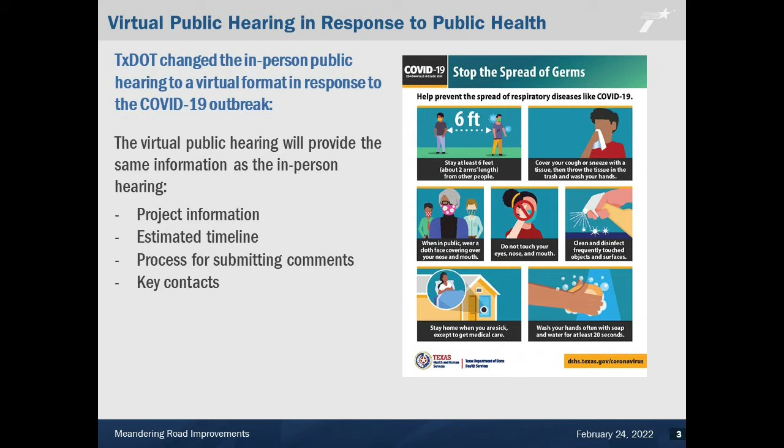All project information can be found on the TxDOT website. For health and safety reasons, we encourage the public to view the project materials displayed online to avoid in-person contact. Full versions of the virtual public hearing displays are available for download at www.TxDOT.gov, search Meandering Road.

The virtual public hearing has been convened by TxDOT and is being held to receive and consider comments from the public regarding the Meandering Road Improvements Project. You may have attended previous public hearings conducted by TxDOT. However, for the benefit of those of you who have never attended one, I would like to explain why and how the department conducts a public hearing.

A public hearing has four essential purposes: first, inform the public of the status of planning for the project and present recommendations based on studies performed to date; second, describe the project so those attending can determine the project's potential to affect their lives and property.

Third, provide the public an opportunity to see information and express their views at this stage in the planning process when flexibility to respond to comments still exists and before location and design decisions are finalized. Fourth, and finally, to develop a record of public views and participation to accompany recommendations for subsequent decisions.

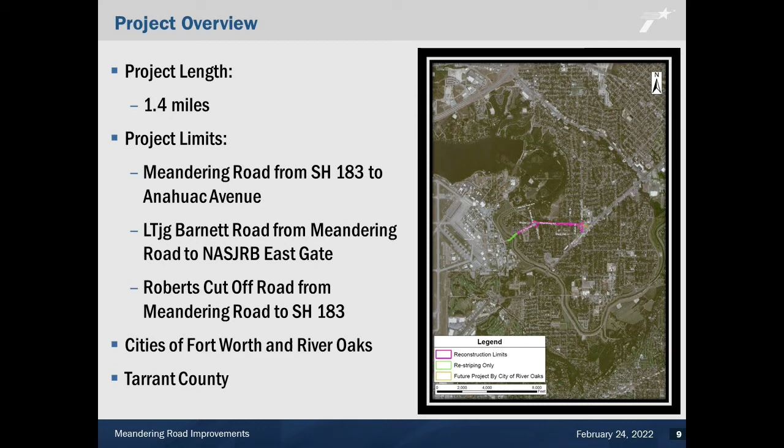The proposed project is approximately 1.4 miles in length. The project limits are along Meandering Road from State Highway 183 to Anahuac Avenue, along LTjg Barnett Road from Meandering Road to the NASJRB East Gate, and along Roberts Cutoff Road from Meandering Road to State Highway 183 in the cities of River Oaks and Fort Worth, Tarrant County, Texas.

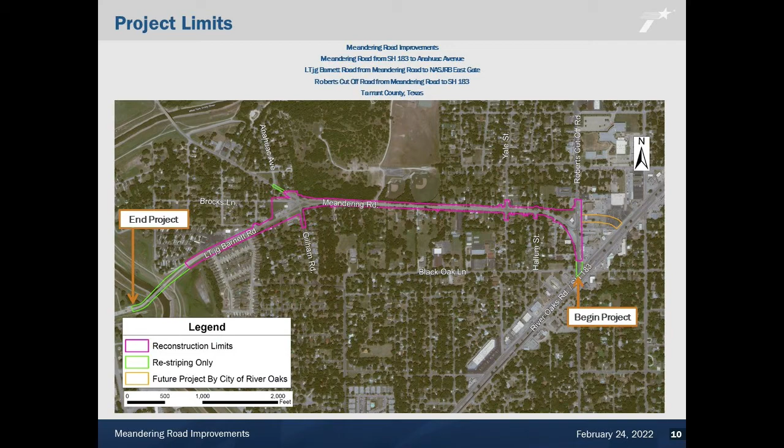This graphic shows the aforementioned project limits, with the project generally beginning at its eastern terminus and ending at its western terminus. Meandering Road currently consists of a 4-lane roadway with 11-foot wide outside travel lanes and 12-foot wide inside travel lanes in each direction, no outside shoulders, and curb and gutter drainage.

LTjg Barnett Road, from Meandering Road to the eastern NASJRB gate, currently consists of a 2-lane roadway with one 12-foot wide travel lane in each direction, no outside shoulders, and open vegetated ditches or swales. No pedestrian or bicycle accommodations exist within the project limits.

Under the no-build alternative, no construction or construction impacts would occur, and the project's purpose and need would not be met. Roadway conditions would continue to deteriorate. Traffic would continue to queue at the intersections, and pedestrians and bicyclists would continue to travel without safe, dedicated sidewalks and bike lanes.

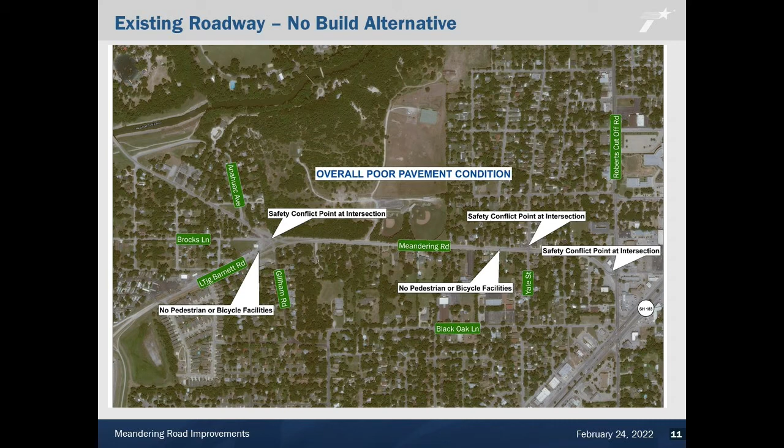The purpose of the proposed project is to construct an arterial roadway that provides a safe, efficient, and cost-effective transportation facility designed to meet projected travel demand.

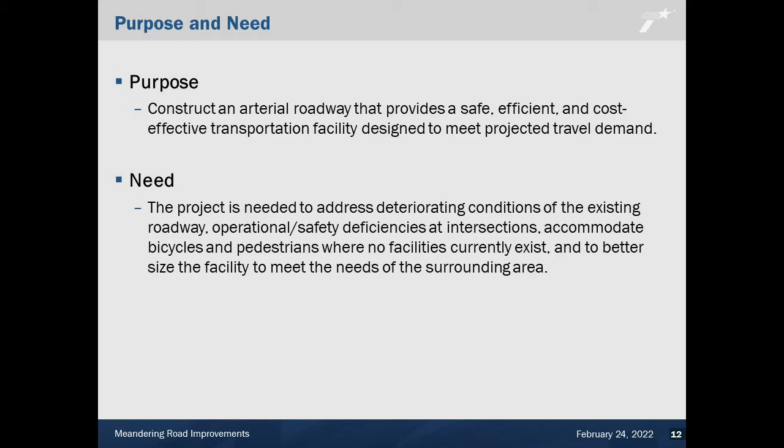The proposed project is needed to address deteriorating conditions of the existing roadway, operational safety deficiencies at several intersections, accommodate bicycles and pedestrians where no facilities currently exist, and to better size the facility to meet the needs of the surrounding area. Multiple alternatives have been considered since the project's inception, and a preferred build alternative has been agreed upon.

Under the preferred alternative, Meandering Road would be reconstructed from 4 lanes to 3 lanes with two 11-foot outside lanes, one 12-foot turn lane in the center, a 10-foot wide shared use path on the north side of the roadway, and a 6-foot sidewalk on the south side. Stormwater drainage would remain curb and gutter.

On LTjg Barnett Road, the roadway would be reconstructed from 2 12-foot wide lanes to 11-foot wide lanes, and adding a 5-foot wide bike lane in each direction on road, a 6-foot wide sidewalk on the north side of the roadway, and a 10-foot wide shared use path on the south side. A curb and gutter stormwater drainage system would be installed.

From the east side of the West Fork Trinity River to the east gate of the NASJRB, only pavement restriping would occur, with no construction. The intersection of Meandering Road and Roberts Cut Off Road would be shifted northward, and a new traffic signal would be installed.

Roundabouts would be constructed at Meandering Road's intersection with Yale Street and LTjg Barnett Road. The roundabouts would include pedestrian and bicycle facilities. A dead end would be created by the project at the eastern end of Brocks Lane at LTjg Barnett Road. Safety lighting improvements would also be included within the project limits, consistent with City of Fort Worth standards.

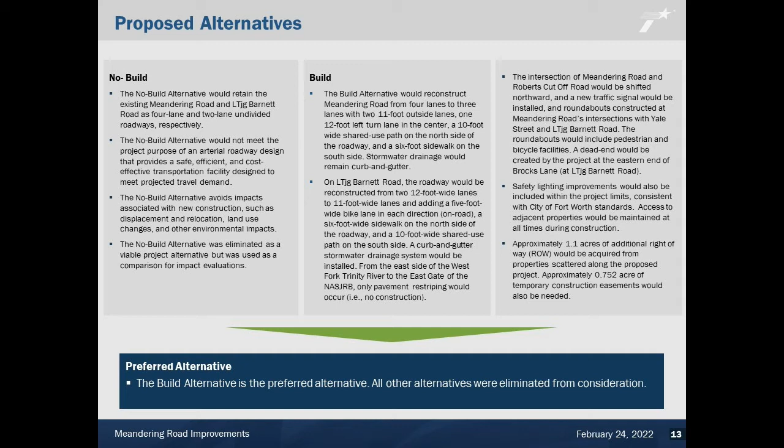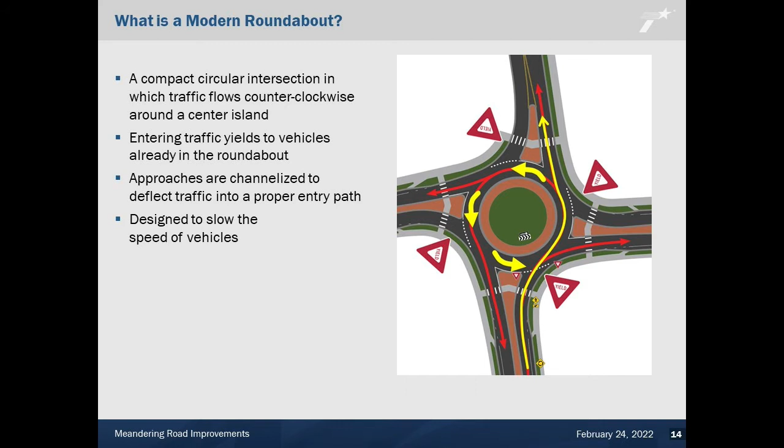A modern roundabout is a compact circular intersection in which traffic flows counterclockwise around a center island. Entering traffic yields to vehicles already in the roundabout. Approaches are channelized to deflect traffic into a proper entry path, designed to slow the speed of vehicles.

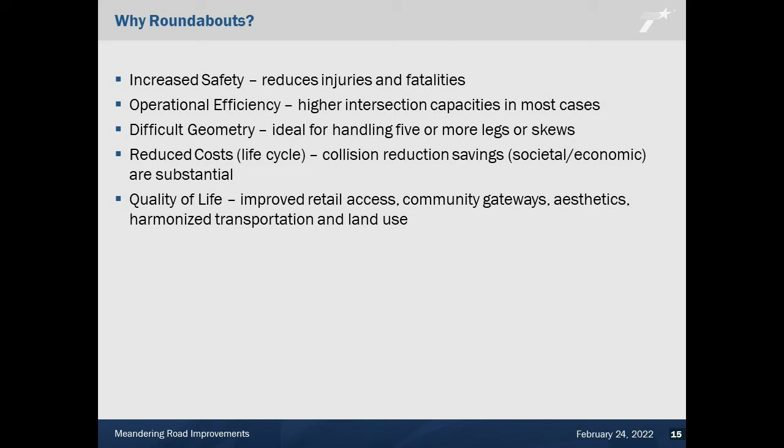The following is a list of why roundabouts are a preferred solution for the proposed project: increased safety, reducing injuries and fatalities; operational efficiency, with higher intersection capacities in most cases; difficult geometry, ideal for handling 5 or more legs or skews; reduced costs over the life cycle, with collision reduction savings that are societal and economic and substantial; and improved quality of life, with improved retail access, community gateways, aesthetics, and harmonized transportation and land use.

The intersection of Meandering Road and Roberts Cut Off Road would be shifted northward with a new traffic signal installed. Improvements to Roberts Cut Off Road would extend southward, terminating at the limits of the future State Highway 183 project limits.

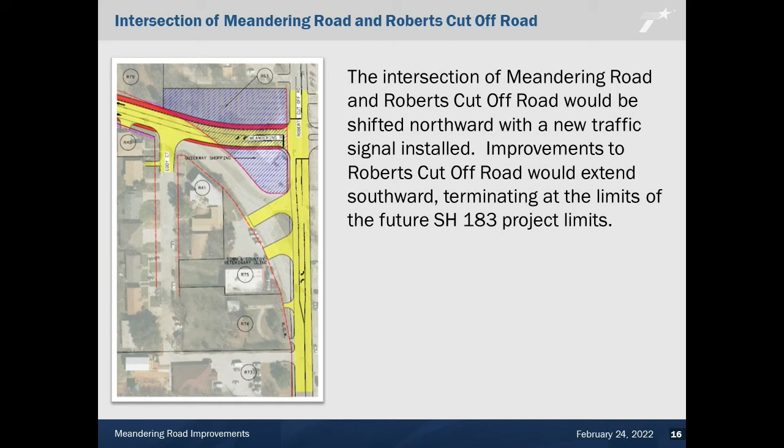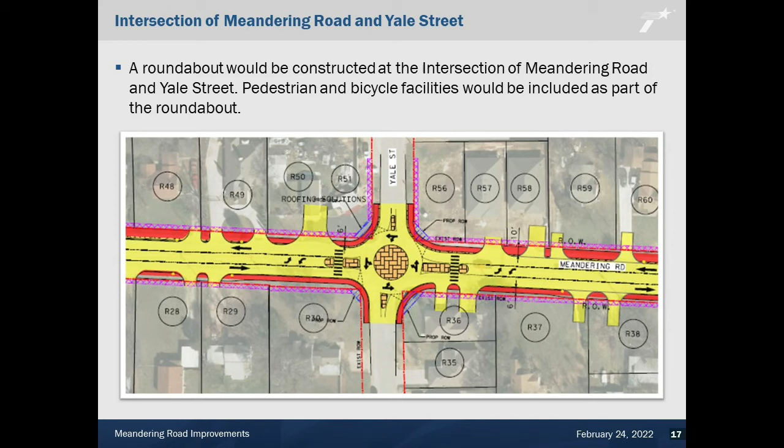Signalized and modern roundabout intersection control methods were compared in terms of traffic operations as part of this project. Existing turning movement counts at each of the 3 subject intersections for select morning, midday, and evening hours were utilized. The analysis studied the construction year, the interim year (construction year plus 10 years), and the horizon year (construction year plus 20 years).

Traffic models were calibrated through weekend visits to the area during high traffic events caused by activities at the nearby Naval Air Station Joint Reserve Base Fort Worth, as well as to witness queuing events on Yale Street with local property owners.

The proposed Meandering Road facility includes 1 vehicle travel lane in each direction, a dedicated center turn lane, a 10-foot wide shared use path on the north side of the roadway, and a 6-foot wide sidewalk on the south side of the roadway. This portion of the proposed roadway is located primarily within the city of River Oaks.

Multiple alternatives for accommodating pedestrians and bicyclists were considered, with the final configuration determined through City of River Oaks, North Central Texas Council of Governments, and TxDOT input.

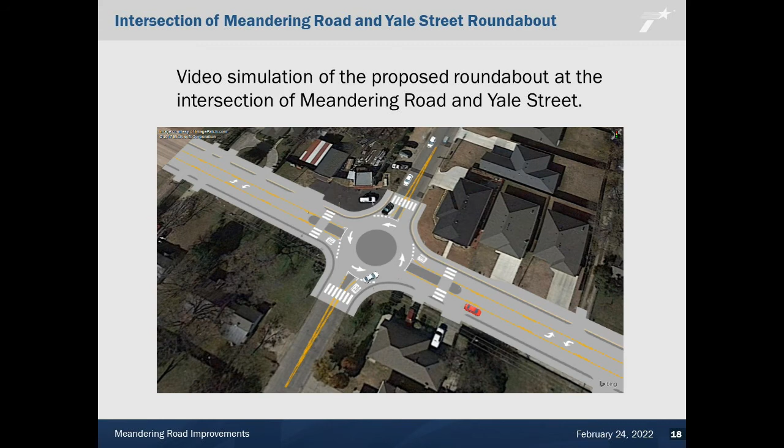The proposed section of LTjg Barnett Road consists of 1 vehicle lane and 1 bicycle lane in each direction. To accommodate pedestrians, a 6-foot wide sidewalk is located on the north side of the roadway with a 10-foot wide shared use path located on the south side of the roadway. LTjg Barnett Road is located within the city of Fort Worth.

A roundabout would be constructed at the intersection of Meandering Road and LTjg Barnett Road. The roundabout would include pedestrian and bicycle facilities. A dead end would be created by this roundabout at the eastern end of Brocks Lane.

Like the proposed roundabout at Meandering Road and Yale Street, the addition of this roundabout would serve to improve operational and safety deficiencies at the intersection, accommodate bicycles and pedestrians where no facilities currently exist, and better size the facility to meet the needs of the surrounding area.

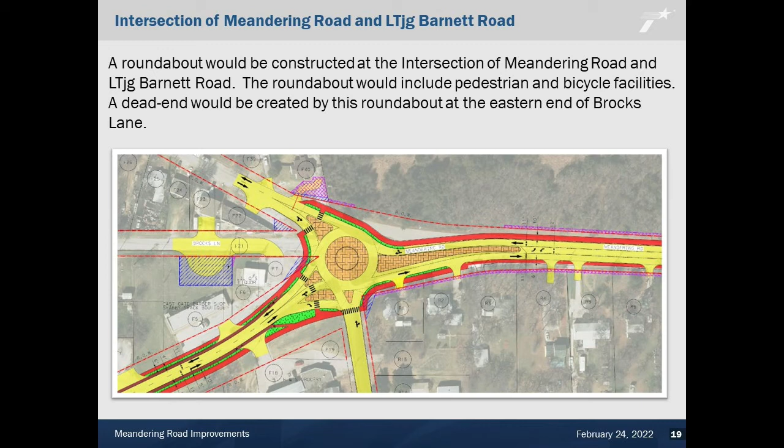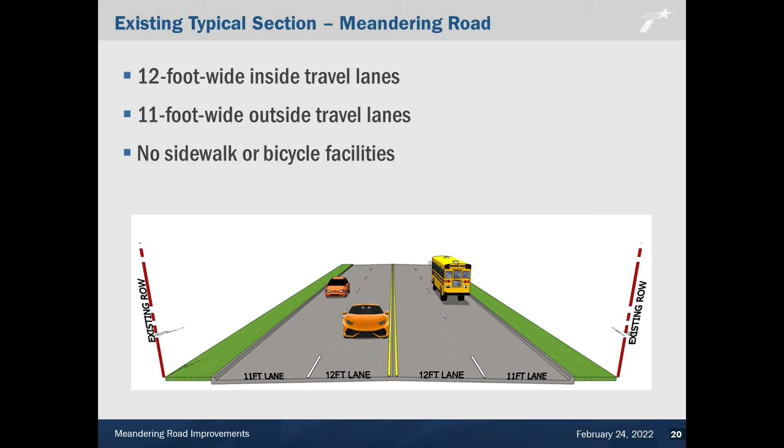It shows 2 11-foot wide travel lanes with a continuous 12-foot wide 2-way left turn lane between the travel lanes. A 10-foot wide shared use path can be seen on the north side of the road, and a 6-foot wide sidewalk can be seen on the south side.

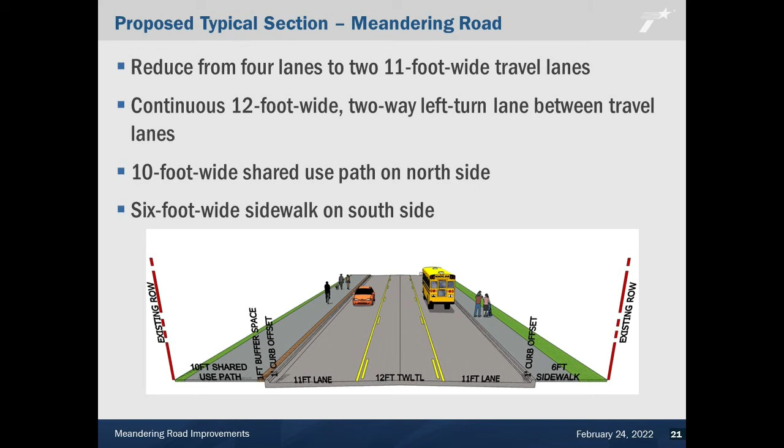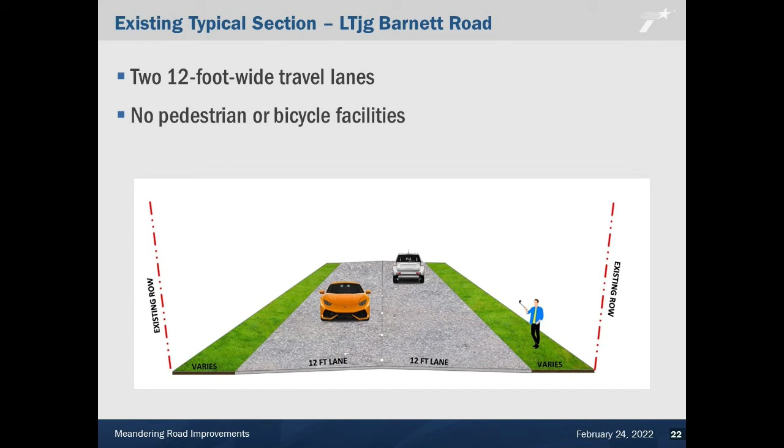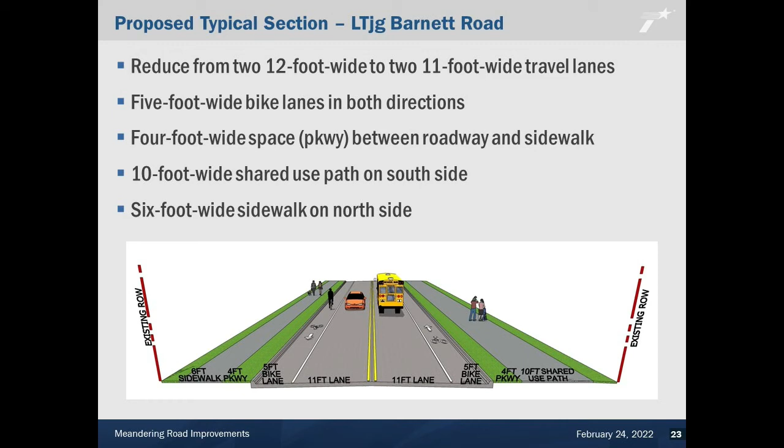This graphic shows a proposed typical cross-sectional view of LTjg Barnett Road. It shows a reduction from 2 12-foot wide to 2 11-foot wide travel lanes, 5-foot wide bike lanes in both directions, a 4-foot wide space between the roadway and sidewalk, and a 10-foot wide shared use path on the south side with a 6-foot wide sidewalk on the north side.

Federal regulation states that the environmental review, consultation, and other actions required by applicable federal environmental laws for the project are being or have been carried out by TxDOT pursuant to 23 U.S.C. 327, and a Memorandum of Understanding dated December 9, 2019, and executed by FHWA and TxDOT.

As part of the environmental process, a categorical exclusion, or CE, is being prepared in accordance with the National Environmental Policy Act, or NEPA.

The CE will be provided to the public with the environmental documentation, which includes evaluations of the following: right-of-way and easements, bicycle and pedestrian accommodations, community impacts, biological resources, archaeological resources, historic resources, hazardous materials, air quality, and water resources.

Environmental impacts would occur in the following areas. Community impacts would occur to environmental justice, or EJ, populations because the census geographies at the intersection of Brocks Lane and LTjg Barnett Road, where a new roundabout is proposed, are greater than 50% minority. However, none of these impacts are anticipated to be adverse since the roundabout would be beneficial for increased safety and ease of access. Community impacts would also occur in the form of potential displacement of Quick Way Shopping at 1001 Roberts Cutoff Road. Further community impacts would occur to access and travel patterns, right-of-way, and easements.

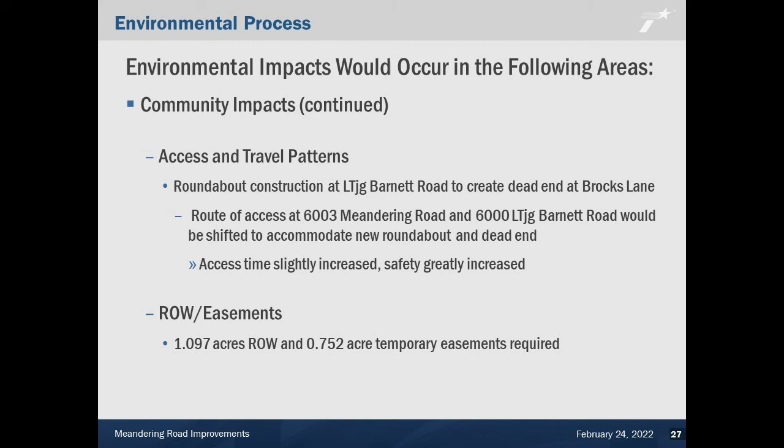The roundabout construction at LTjg Barnett Road would create a dead end at Brocks Lane. This would result in a shift in the route of access at 6003 Meandering Road and 6000 LTjg Barnett Road to accommodate the new roundabout. In addition, 1.097 acres of right-of-way and 0.752 acre of temporary easements are needed for the proposed project. The North Central Texas Council of Governments coordinated with the Federal Highway Administration, or FHWA, for $18,284,010 in federal grant funds.

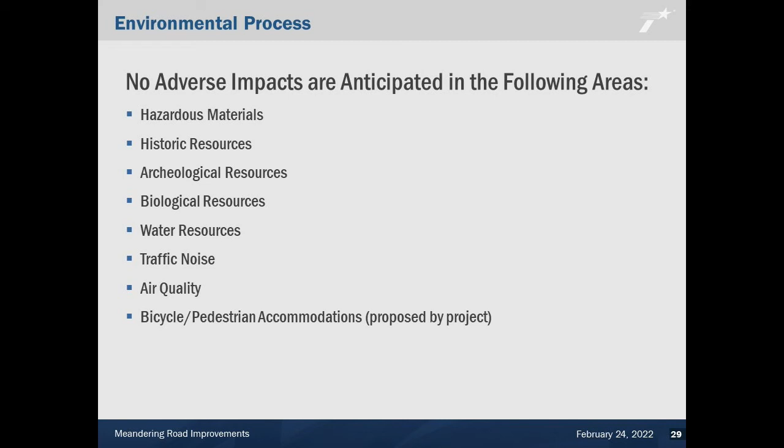No adverse impacts are anticipated to occur in the following areas: hazardous materials, historic resources, archaeological resources, biological resources, water resources, traffic noise, air quality, and bicycle and pedestrian accommodations, since they are proposed by the project.

Upon completion, the environmental technical reports will be viewable and downloadable at www.txdot.gov. Search Meandering Road. The following technical reports will be available: Surface Water Analysis Form, Biological Studies, Historical Project Coordination Request, Archaeological Background Study, Community Impacts Assessment, Hazardous Materials Initial Site Assessment, and Air Quality Technical Report.

As mentioned, 1.097 acres of right-of-way would be required, and approximately 0.752 acre of temporary easements would be required. Regarding right-of-way acquisition, the right-of-way acquisition process would be led by the cities of Fort Worth and River Oaks and will follow standard TxDOT processes. The cities of Fort Worth and River Oaks would take responsibility for their respective acquisitions.

The Uniform Relocation Assistance and Real Property Acquisition Act of 1970 is a law passed in 1970 that was designed to ensure that anyone who owned property needed for public purpose would be treated fairly. The law establishes guidelines for the acquisition of property and the relocation of displaced individuals and businesses. It is the policy of TxDOT that individuals impacted by transportation systems expansion shall not be denied benefits, excluded from participation, or otherwise be subjected to discrimination based on the grounds of race, color, sex, age, handicaps, or national origin.